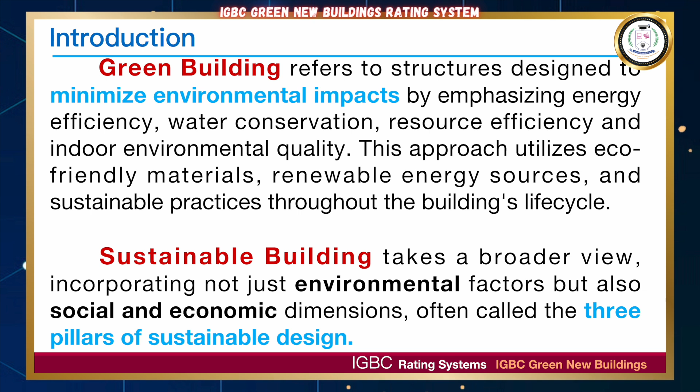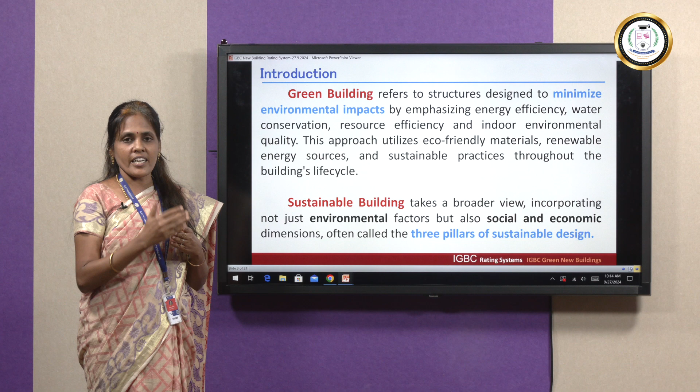On the other hand, sustainable building takes a broader view, incorporating not just environmental parameters but the three pillars of sustainability: social, economical, and environmental factors, called the three pillars of sustainable design.

When you talk about green building rating system, as a part of a green building, this rating system plays an important role in certifying the greenness of a building. Green building rating system brings together a host of sustainable practices and solutions to reduce environmental impacts. These systems are tools that assess the environmental impact of buildings by considering factors such as energy efficiency, water conservation, and resource efficiency.

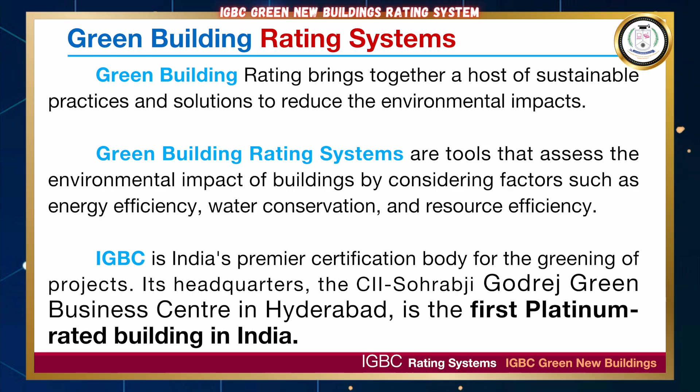IGBC is India's premier certification body for the greening of projects. Its headquarters, the CII Sohrabji Godrej Green Business Center in Hyderabad, is the first platinum rated building in India.

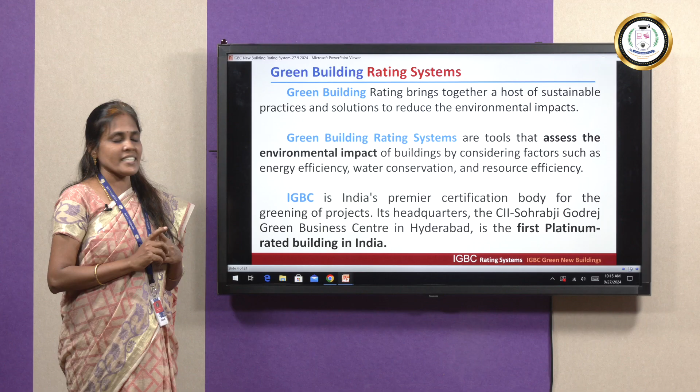About IGBC: Indian Green Building Council rating systems are voluntary, consensus based, and market driven programs. It was formed in 2001 as a part of CII, which is a non-governmental, not-for-profit, industry-led organization founded over 125 years ago. The vision of the council is to enable a sustainable built environment for all and to facilitate India in becoming one of the global leaders in the sustainable built environment by 2025.

So what are the benefits we are getting for green new buildings? Green new buildings can have tremendous benefits, both tangible and intangible. The most tangible benefits are the reduction in water and energy consumption right from day one of occupancy. The energy savings could range from 20 to 30%, water savings around 30 to 50%.

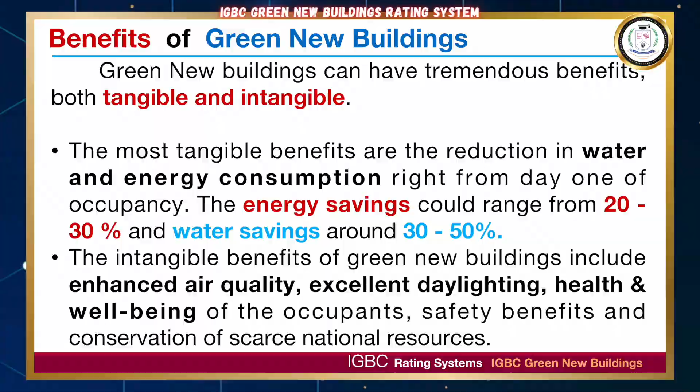The intangible benefits of green new buildings include enhanced air quality, excellent daylighting, health and well-being of the occupants, safety benefits, and conservation of scarce national resources.

IGBC rating system has launched various green rating systems for buildings and built environment designed to address various building typologies like IGBC Green Residential, IGBC Commercial, IGBC Green Built Environment, IGBC Green Industrial, and other building typologies like school and campus design, and IGBC Net Zero projects for energy, water, and carbon.

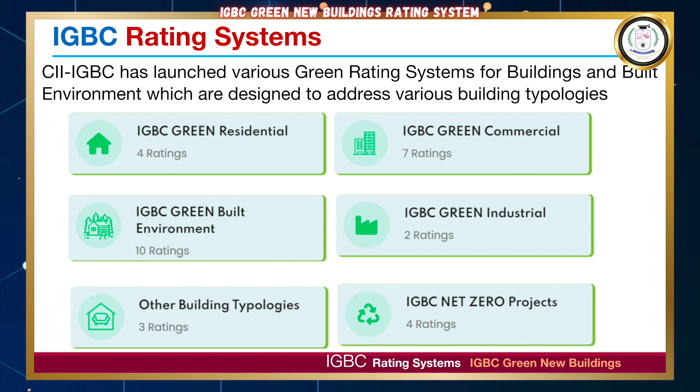In NEST, the IGBC NEST Eco-Friendly Self-Developed Tenements Framework is designed to address the specific measures for EWS, LIG, and MIG, that is middle income group.

IGBC Green Built Environment has the following rating systems: IGBC Green Townships, IGBC Green Cities, IGBC Green Existing Cities, IGBC Green Hill Habitat, IGBC Green Mass Rapid Transit System, IGBC Green Existing Mass Transit System, Green Railway Stations, Green High Speed Rail, Green Landscapes, and Green Villages. These are all the ratings under built environment.

Then Green Industrial, that is factory buildings, logistic parks, and warehouses. When you talk about factory buildings, the IGBC Green Factory Building is the first rating program developed in India exclusively for the industrial sector. Then other building typologies like green schools, green campus, and green place of worship.

IGBC Green School Rating System is unique in the sense that it addresses eco-education, health and hygiene, besides the infrastructure facilities, energy efficiency, water conservation, resource efficiency, and waste management.

And then IGBC Net Zero. On Earth Day in 2021, IGBC launched its mission on net zero with a vision to facilitate India becoming one of the foremost countries in transforming to net zero by 2050. This is a journey to achieve net zero buildings and built environment by 2050 in all aspects, that is energy, water, waste, and carbon.

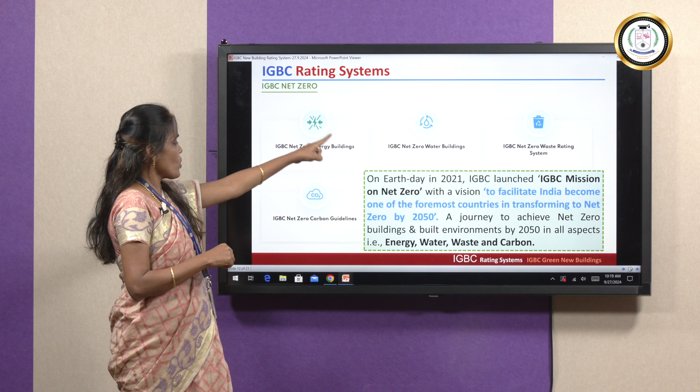So now coming to this session, one is IGBC commercial. In IGBC commercial, we have IGBC green new building rating systems, IGBC green existing buildings, IGBC health and well-being, green healthcare, and then green data center, green service building, green resort, and then green interiors.

For each and every rating system, IGBC provides an abridged version of the reference guidelines. Especially this IGBC new building rating system is provided for conducting the exams, and this has study materials for writing the accredited professional exam.

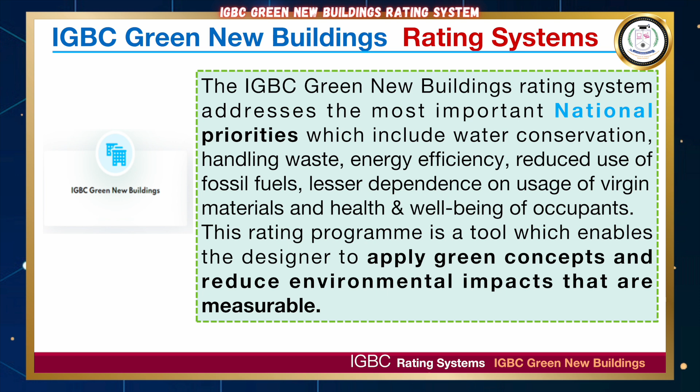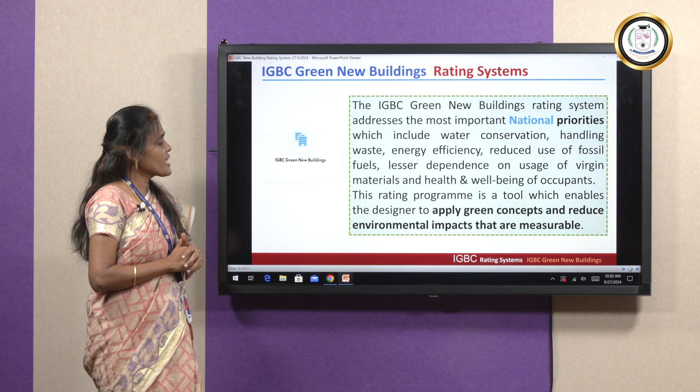This new building rating system addresses the most important national priorities, which include water conservation, handling waste, energy efficiency, reduced use of fossil fuels, lesser dependence on usage of virgin materials, and health and well-being of occupants. This rating program is a tool which enables the designer to apply green concepts and reduce environmental impacts that are measurable.

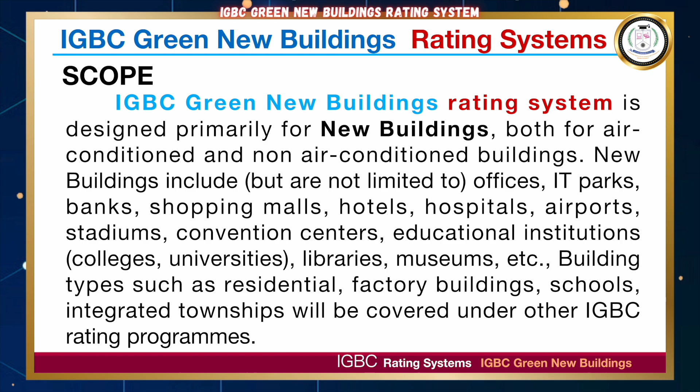So what is the scope under it? IGBC Green New Building Rating System is designed primarily for new buildings, both air conditioned and non-air conditioned. New buildings include but are not limited to offices, IT parks, banks, shopping malls, hotels, hospitals, airports, stadiums, convention centers, educational institutes, colleges, universities, libraries, museums, etc. Building types such as residential, factory buildings, schools, and integrated townships will be covered under other IGBC rating programs we have seen before.

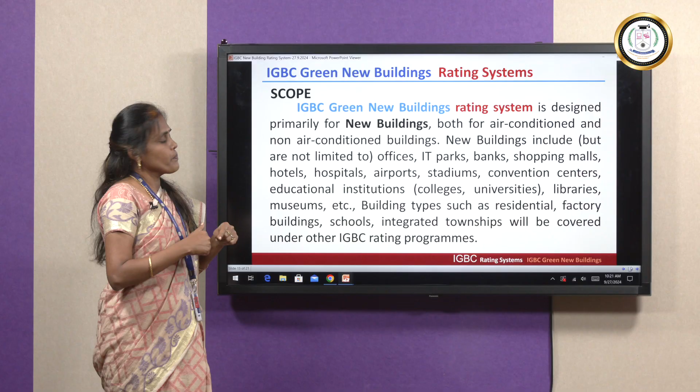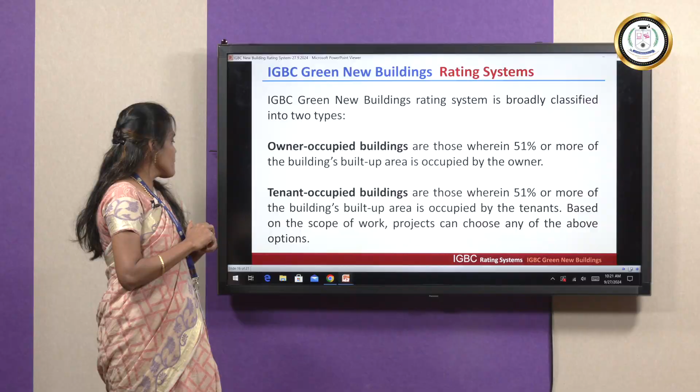This IGBC new building rating system is broadly classified into two types: owner occupied buildings and tenant occupied buildings. Owner occupied buildings are those wherein 51% or more of the building's built up area is occupied by the owner. Tenant occupied buildings are those wherein 51% or more of the building's built up area is occupied by the tenants. Based on the scope of the work, projects can choose any one of the above options.

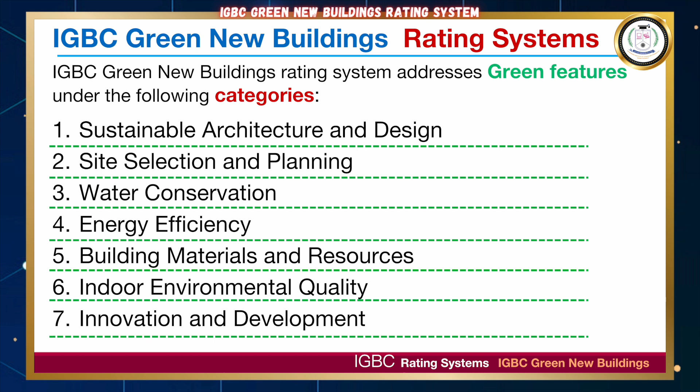IGBC new building rating systems addresses green features under the following 7 categories: sustainable architecture and design, site selection and planning, water conservation, energy efficiency, building materials and resources, indoor environmental quality, and innovation and development. These are all the broad categories where the green features have been addressed.

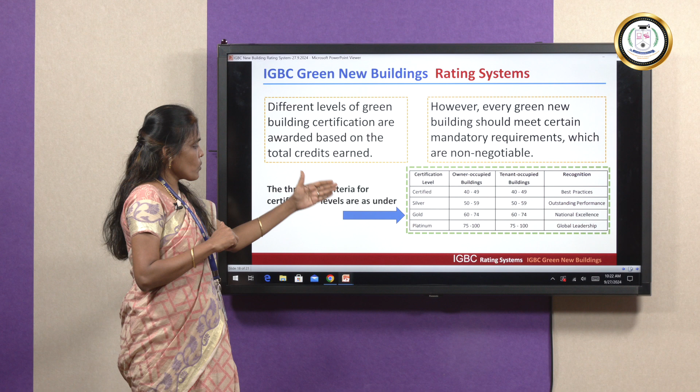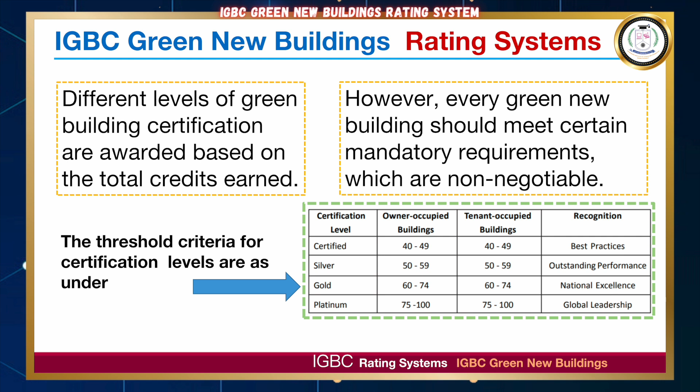Different levels of building certification are awarded based on the total credits earned. However, every green new building should meet certain mandatory requirements which are not negotiable. The threshold criteria for certification levels are: certified, silver, gold, platinum. This certification level is based on the score credits given, and it will be recognized as best practices, outstanding performance, national excellence, and global leadership based on the certificate levels.

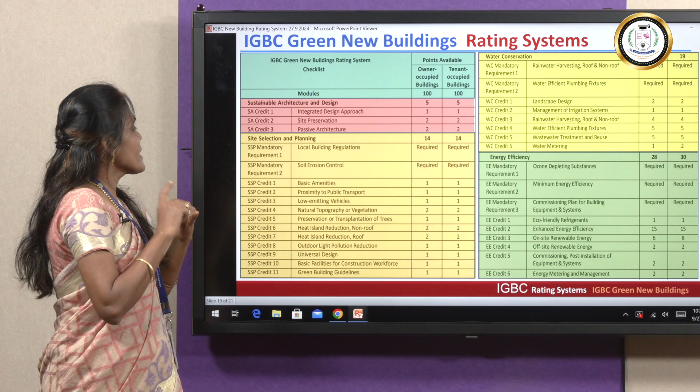Then site selection and planning has mandatory requirement 1 and mandatory requirement 2. Definitely the local building regulations need to be filed - this is mandatory and needs to be submitted. Soil erosion control and sedimentation control are also required mandatory requirements.

Credit 1 is basic amenities, and proximity to public transport. Basic amenities within 1 kilometer radius - whatever is located closer within the proximity, the amenities that are present - this has been provided, and the credits will be given accordingly.

So proximity, like proximity to public transport, low emitting vehicles, natural topography or vegetation, preservation or transplantation of trees, and then heat island reduction in the non-roof areas and also heat island reduction in the roof areas, outdoor light pollution reduction, and then universal design, basic facilities for construction workforce, green building guidelines.

Under this, the total credits we can earn is 14 points apart from the mandatory requirements.

And then water conservation, under water conservation we can credit 18 points. Water conservation has two mandatory requirements. One is rainwater harvesting for roof and non-roof areas, so we can enhance the groundwater source to reduce municipal water use. Water conservation mandatory 2 is water efficient plumbing fixtures.

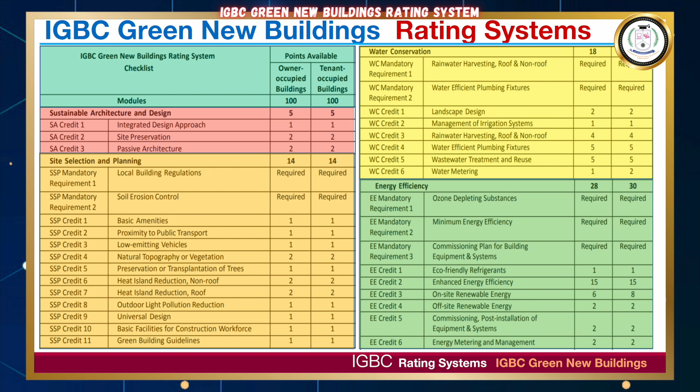For the various credits, energy efficiency credit 1 is eco-friendly refrigerants, credit 2 is enhanced energy efficiency, and credit 3 is on-site renewable energy, off-site renewable energy, commissioning and post installation of equipment and systems. The last credit is energy metering and management.

The next module is building materials and resources. Under this, the mandatory requirement is that we need to segregate waste post occupancy. We also have credits like sustainable building materials, organic waste management post occupancy, handling of waste during construction, and use of certified building materials, products and equipments. 16 points can be earned under this.

Indoor environmental quality is the next main category, worth 12 to 9 points. For indoor air quality mandatory requirements, we definitely need minimum fresh air ventilation and tobacco smoke control. These two are the mandatory requirements under indoor environmental quality.

Credit 1 is talking about CO2 monitoring, daylighting availability, and outdoor views, minimizing indoor and outdoor pollutants, low emitting materials, occupant well-being facilities, indoor air quality testing after construction and before occupancy, and indoor air quality management during construction.

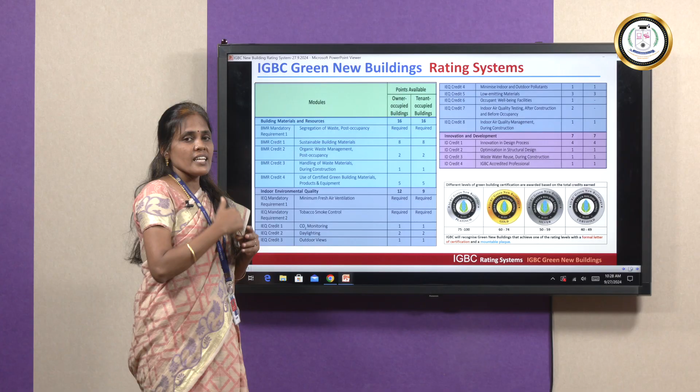The last category is innovation and development, which has 4 credits. Innovation and development credit 1 is innovation in the design process - what innovation techniques have been implemented in the project, for which you can earn points. Apart from that, any exemplary performance in the above addressed categories can be added into the innovation practice, adding 1 point to innovation in design process.

Optimization in structural design, wastewater reuse during construction, and IGBC accredited professional - if you are an IGBC accredited professional, you can earn 1 point under the project.

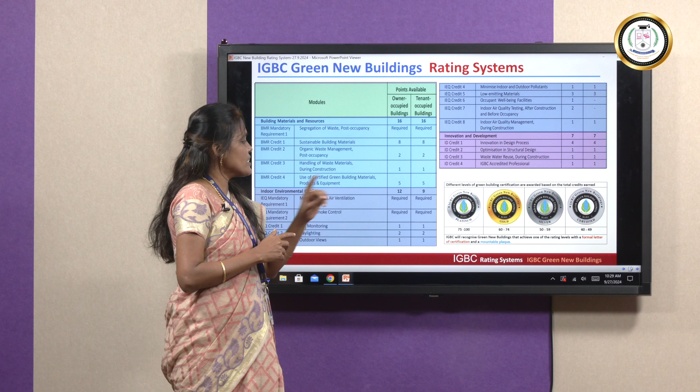As I said earlier, different levels of building certification are awarded based on the total credits earned. That is, 75 to 100 points gets platinum, 60 to 74 gets gold, 50 to 59 gets silver, and 40 to 49 is certified. So a minimum of 40 points needs to be earned for the building to be certified.

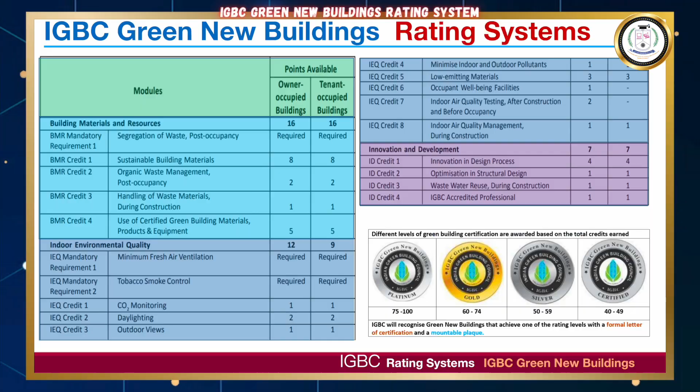IGBC will recognize green new buildings that achieve one of the rating levels with a formal letter of certification and a mountable plaque. Next session we will see each category in detail.